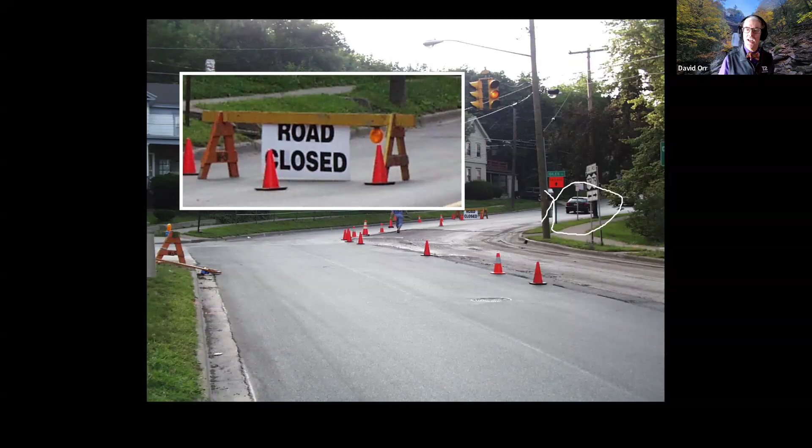Okay, so some of you are turning left, some of you are going up where the car is. Okay, and it's a little confusing, especially if you look carefully at the sign that's up there in the middle of the screen and it says road closed. What they were doing was trying to reuse the sign. I understand that, but think about what message you're giving to somebody. What you're supposed to do is come up around the corner to where this car is right here, okay? Over here on the right. And it's a little bit confusing in that respect. So again, key is communication, good, clear communication. And if you think about it, what we're trying to tell the user, the driver, is what they should do.

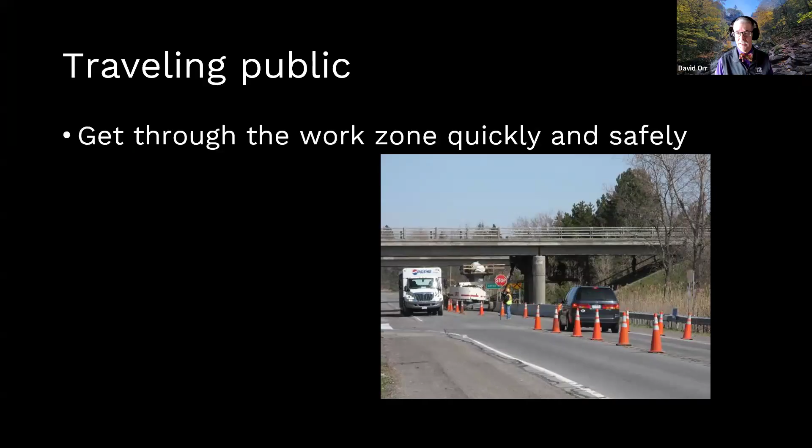The operators, on the other hand, the crews, they want to keep working without slowing down. But of course, that's not possible sometimes, and we have to keep ourselves safe. Supervisors, well, they want that job done as fast and cheaply as possible.

And then, of course, traffic control personnel. You want a smoothly operating work zone that's easy to manage, though maybe you got to work a little harder than what this gentleman is doing here.

Okay. Now, just for the sake of helping me out, I've got my participant list, and we'll lower everybody's hands. Raise your hand if you've flagged traffic, if you've been out there flagging live traffic. I just want to get a sense of that. That helps me. Oh, quite a few of you. That's good. If you didn't raise your hand, but you're involved with designing or setting up work zones, it's not a bad idea to find a way to do that, get yourself some training, and see how it is.

Flagging tends to be one of two things. It either tends to be boring, where's all the traffic, like you see in the picture, or it's just insane. And how do you even deal with it? But don't start on a big project. Start on a small one. But again, do it right. It's pretty important. The goal of this is we have to do work in the roadway.

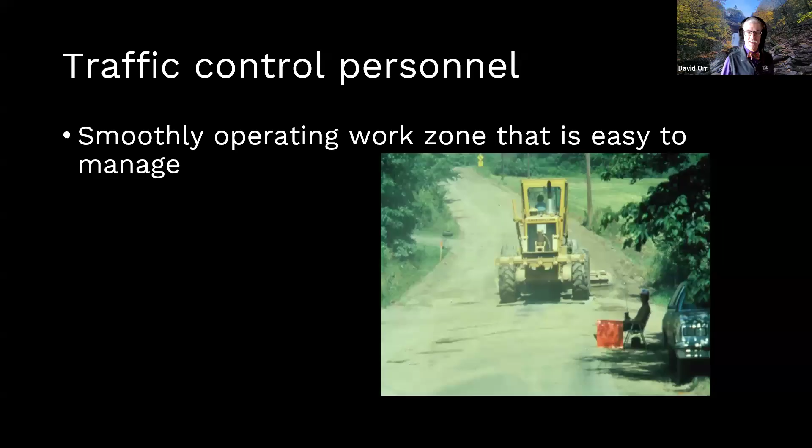We're going to create change. People don't like change, and no one wants to be inconvenienced. Okay. But you also don't want to put people in harm's way. That's pretty important. Now, I'm at home one night, and all of a sudden there's cars coming through my neighborhood. I'm like, what is going on?

Now, I did say I wanted to come back and talk a little bit about the traveling public. That includes the cars, of course. It includes buses, trucks, bicycles, pedestrians, and people who are disabled in one form or another. Okay? So let's talk about each of those just a little bit. Most of the time we think about cars. You can do simple messages maybe for cars. They're smaller, they can get around, but again, we need to communicate clearly.

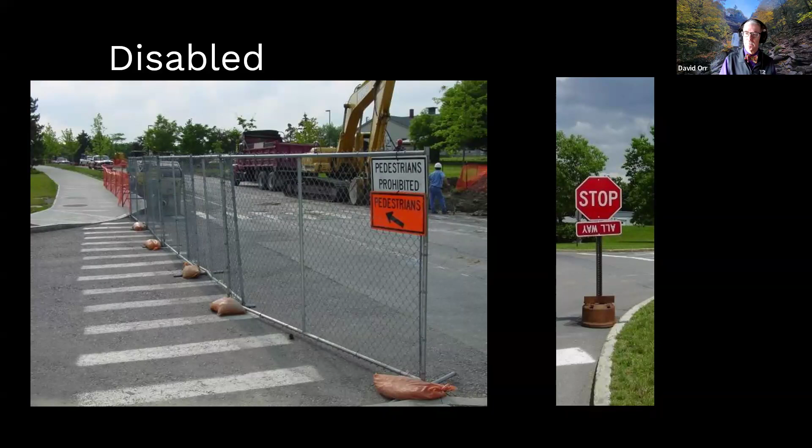So now let's start thinking about setting up a work zone. Now, what are the regulations for setting up a work zone? Well, there are 4 things I'm going to point out to you. The first one is the MUTCD. Now, the MUTCD here in New York State right now consists of the national MUTCD from December of 2023, really promulgated in January of 2024, and the New York State supplement, which actually goes back to the old national MUTCD, and New York State is working on their updated supplement. Okay, so that's the rules currently for the MUTCD.

And remember, the MUTCD applies to all roads open to public travel, which may include a privately maintained roadway. Like most of the roads here at Cornell are technically an open to public travel roadway. Okay. Now here in New York State, we also do have the New York State Work Zone Traffic Control Manual, and in the handout, which is in the chat pod, if you haven't opened that chat pod up, go ahead and open it. We'll relink that handout for you. There's a link to the New York State DOT Work Zone Traffic Control Manual, which might be a useful document for you to look at.

It's got some special details, and especially if you're doing a detailed work zone that's on a multi-lane roadway or an interstate, probably a pretty good thing to look at. And it's got standard sheets, the actual manual itself. I'll click on that. You can see all kinds of sections on road type, advanced signs, a lot more detail than we can cover in a 1-hour webinar. So if you're doing anything really complicated, that's something I would have you look at.

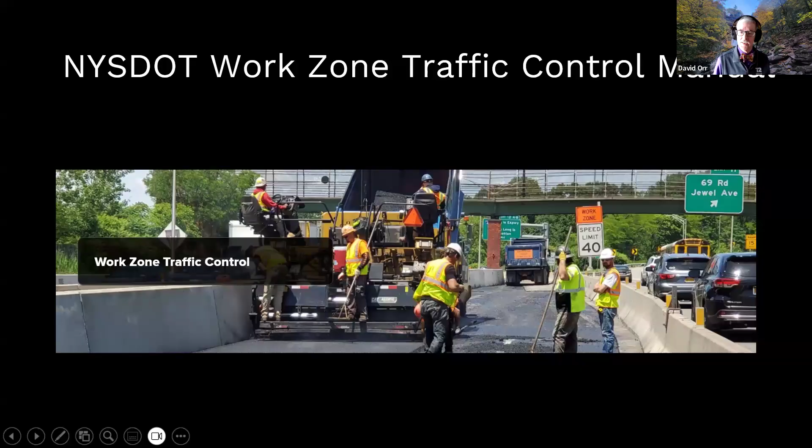Now, we do put out a work zone safety and a flagger pocket guide. These meet those standards with the caveat that they're not designed for freeways, they're not designed for really, really large roadways or high volume. They're designed for the low volume 2-lane roads that most of us deal with, a few thousand vehicles per day. And they're great starting points. But if you've got any specific details, you need to go to the MUTCD. And we'll come back to these little handouts here in a little bit. And if you need them, let us know, we can get you copies.

You'd put a left arrow. Drift. I like that one. If you had the right car, you could drift around the corner. Should follow the MUTCD standards, have some arrows. Okay, a turn arrow. Yeah.

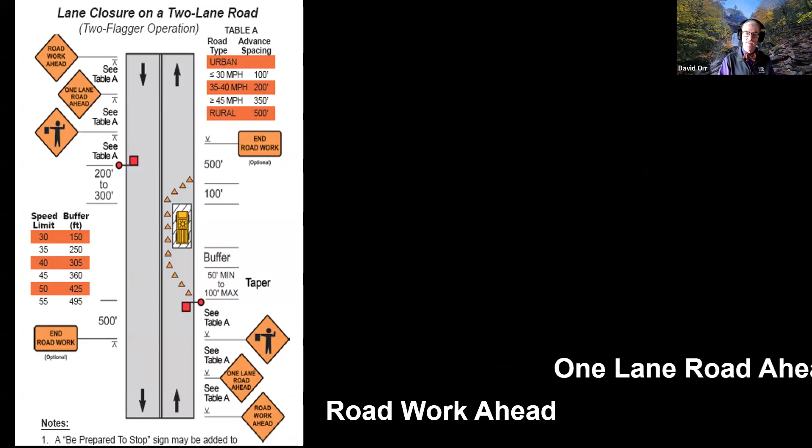So in our case of the 2 flagger operation, which is by far the most common, we would have the road work ahead, we'd have the 1 lane road, and then we'd have the flagger symbol. And we space those signs out, ranging from 100 to 500 feet, depending on the speed that people are traveling, whether it's urban or rural. And I'll come back to those numbers in just a little bit.

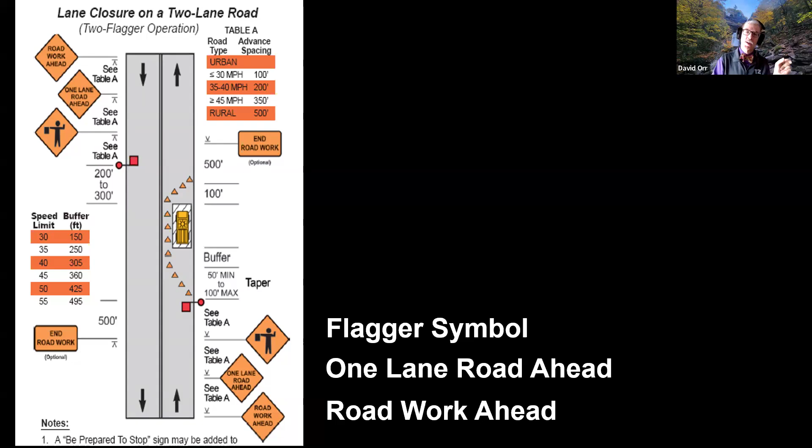There needs to be a space between where the flagger and the transition zone is and the actual work. So that if somebody does go through the cones, goes past the flagger, then you've got time for the vehicle to stop. So the question is, what is the buffer length at, well, we'll say 55 miles an hour. Well, it turns out the buffer lengths are driven by the stopping sight distance. But you don't have to memorize these things. They're in all of the standards.

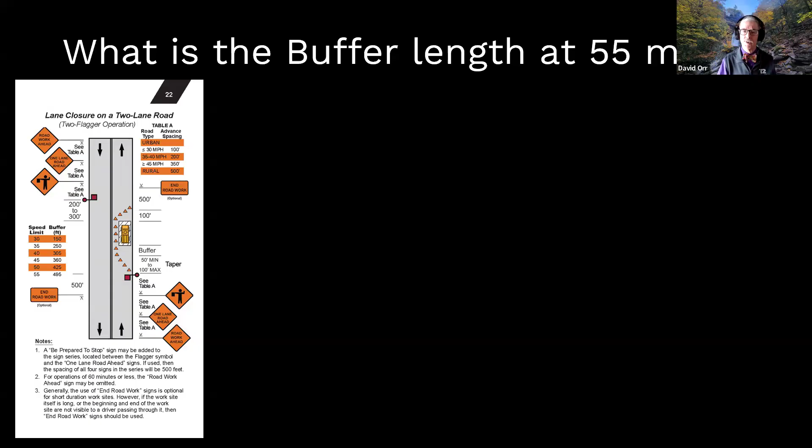So as an example, let's look at the lane closure on a two-lane road, and I'll blow it up so you can actually see it. Don't expect you to read it. It's way too small. But let's blow up the part that tells you for the speed limit what the buffer length is. Okay? So in this particular case, 55 miles an hour, you can see what the buffer length is. It's essentially just under 500 feet.

Now, somebody asked, where is the crash truck? The New York State Department of Transportation is using attenuator vehicles in their work zones. In fact, there's a note in our work zone pocket guide that specifically mentions that. You'll notice the drawings in the work zone pocket guide do not specifically call out the crash attenuator vehicle. That's not because we don't like crash attenuator vehicles, but we know in a real world situation that may not always be possible. So if you've got high speed, if you've got high volume, we recommend you look at using a crash attenuator vehicle. And again, the state DOT is going to use them on all of their work zones.

But what we're also trying to be is realistic. I will tell you right now, absolutely, you got to have a buffer space. If you're not going to have a crash attenuator vehicle, that buffer space becomes even more important. And the other thing with crash attenuator vehicles, just want to point out, putting the crash attenuator vehicle at the wrong location can actually cause an issue. It needs to be at the beginning of the buffer, not at the end. And I've seen several that were placed in the buffer zone at the wrong end.

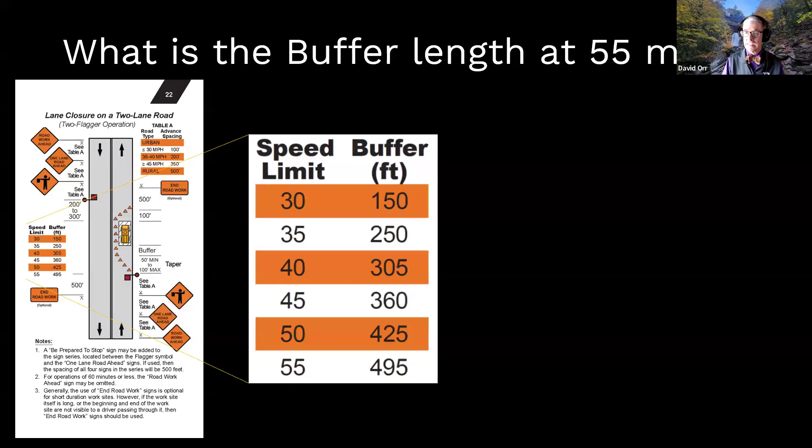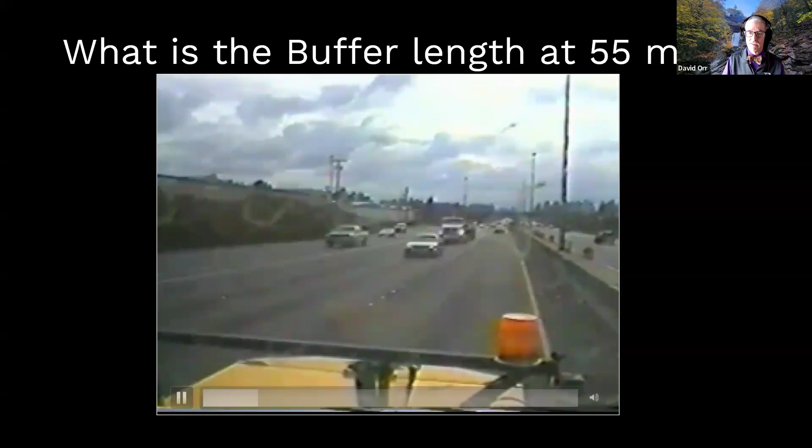And why is that important? Well, what's the buffer length at 55 miles an hour? Well, it's 500 feet. And the reason is you need the distance for the crash attenuator vehicle to move or for the person to stop if they go through the cones. In this case, you absolutely want one on an interstate system. Watch carefully. Now, the vehicle doesn't have its brakes on to start. That's how this works. Then they apply the brakes after the crash attenuator gets hit. And you can see they still went a couple of hundred feet. So it's pretty important to have a good buffer space.

And if you're wondering, the buffer space is not optional. That's not an optional space. The only optional is the last one, which we'll get to in just a minute. So you really want that space. And by the way, the buffer is not a parking space for supervisors. That is an empty area to allow either a crash attenuator if you've got them, or at least for a vehicle to stop before it enters the work zone area.

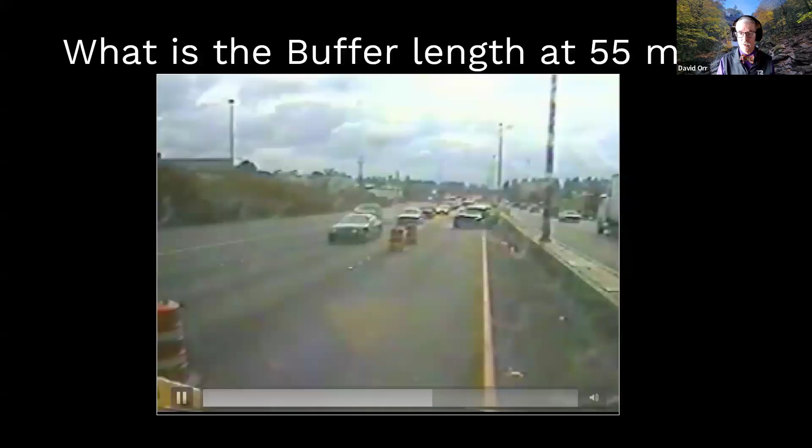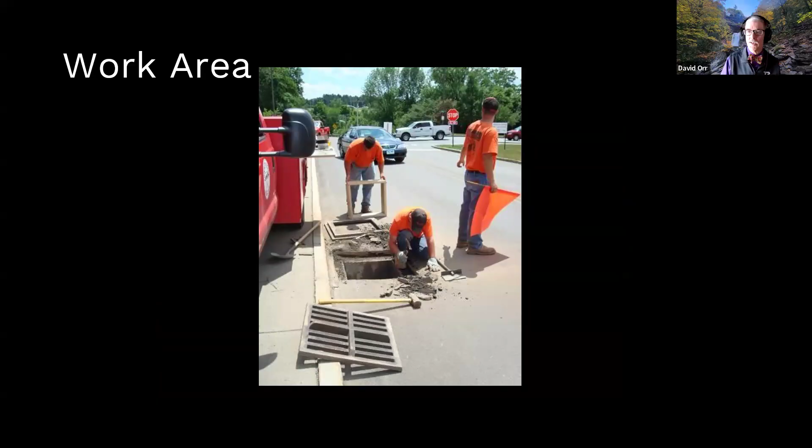Now, what are the spacing of the advance signs? Let's go back and look at that. In an urban area, it's about 100 to 350 feet, depending on the speeds, and 500 feet in a rural area. If you are from outside of New York State, the distances may be different. New York State has its own distances. I actually like the fact New York State has some slightly smaller distances for low speed, 30-mile or less roadways. But keep that in mind. You need to check your own state's regulations if you're working outside of New York State, but it depends on the speed. And again, technically, whether it's urban or rural, the key is to give people time to react.

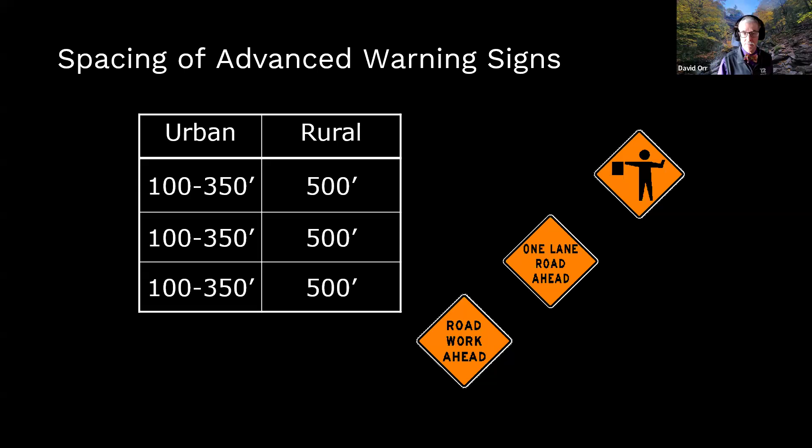Now, we need to make sure that everything's set up. The most dangerous time for putting in a work zone is when you're setting it up. Okay? So let's talk a little bit about placement and removal. Okay? Don't mislead the public.

So the first thing you're going to put up are your advanced signs. So you're going to put up a road work ahead sign. You're then going to put up your one lane road ahead sign and then your flagger symbol sign. You're going to put those signs up and you can put a fourth sign if you want to. Okay? Now, what goes next? What goes next?

Now, I've got a note in here in the Q&A while I'm listening. I want to have you guys throw the answer in the Q&A on what goes next after the flagger symbol sign. Our old friend Al Bachner, who's one of our circuit riders, does point out the fact that you do need a buffer space in front of a crash attenuator vehicle if you're using them. So your buffer space gets even longer. But that means you have to have the space for the crash attenuator vehicle to move forward, as well as the buffer space for the work.

So again, if you're using them, there are standards. That's why I wanted you to go to the New York State DOT work zone guide, because it talks about those spacings and all that. And do you have that spacing?

Okay, so let's see what we've got listed here in our what goes next. I've got cones. I've got the sign for the end. I've got a flag tree. I've got a taper. I've got the distance to the work zone, cones and barrels. Ah, there it is. There's the one I'm looking for. The next person, or next item that goes in, is the flagger themselves.

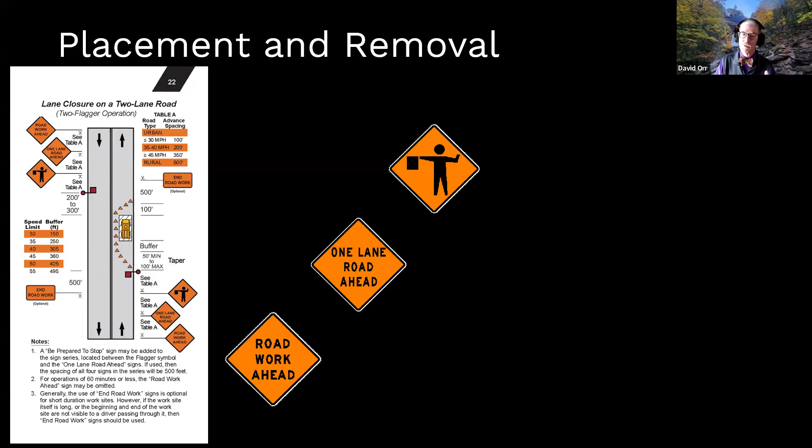And to take things down, don't take that flagger out and still have the cones up, because what do people need to do? So remember that. The order should actually be the cones come next, not the flagger. Okay? So the cones would come down, the flagger would actually be the next to last person, and then you remove your signs in the exact opposite order you put them up. Because it's the single most dangerous time.

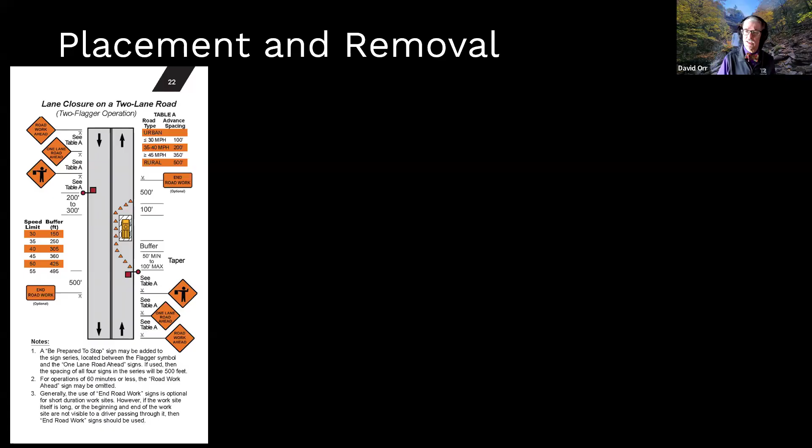Now his helmet came off, but he picked it right back up. He picked his hard hat up. And that's why, by the way, in some work zones, they're actually putting helmets with the straps to keep them on. But luckily, no serious injuries here. Again, putting up a work zone is one of the most dangerous times. So keep that in mind as you're moving forward. Okay?

Now, again, I'm going to say this again because it drives me nuts. Hide, cover, or turn away your work zone signs when they are not needed. Okay? Hide them. Don't show them. It drives me nuts when I see them up in the middle of the night.

And if you're working around a corner, all the same signs come into play. But again, think about sight distance. Think about where you're going to put the flagger. You know, if you just use the standard distances, but you put the flagger on the wrong side of the corner, can they be seen? You know, all of our pocket guides and our work zone drawings all show nice, perfectly straight roads, but they're not. So think about hills and curves and stuff like that. Okay? And in an hour, we just can't go through a lot of details.

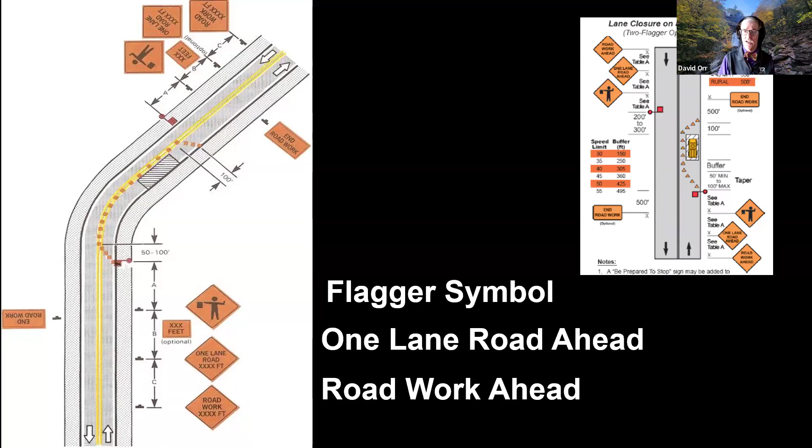Now, let's talk a little bit about flaggers. We don't have a lot of time to talk about flaggers, but they are one of the most important parts of a good work zone. They should not be the person who's the last person on the job and never does things quite right. No, you actually want your best people being flaggers. They're protecting you. So what are the qualifications for a good flagger? If you could throw into the poll, what do you think are qualifications for a good flagger?

Attentive, alert, sober. They have some endurance. Yeah. They pay attention. Yep. They should be trained. Not on the phone. Yeah. They like the idea. Somebody put in a note about putting a couple of cones next to the flagger station to highlight where they're standing. I always like that idea to move the cones around with you. Yep. So all kinds of things.

We know what good flaggers should do, but a lot of times we don't necessarily practice what we think about. To me, a good flagger must be alert, watching traffic. It's like security people at a sporting event who have to watch the crowd and not watch the event. Flaggers need to be watching the traffic. They need to be in a place where they can be seen. They need to be visible. Okay? They really should be the people who have a little bit of motivation, that really want to do the job to some extent. Okay? You need to make sure they're trained to do the job.

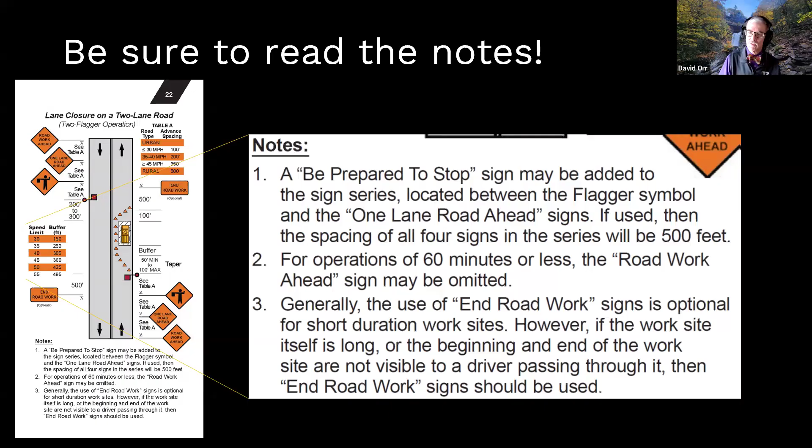So let's just look at the 1 and 2-flagger operations and the notes in the 1-flagger operation. And I'm going to put this one on and read it to you just because it's pretty important. A single flagger may be adequate for low volume situations with short work zones on straight roadways. Where 1 flagger is used, the flagger must be positioned to be visible to approaching traffic from both directions. Okay?

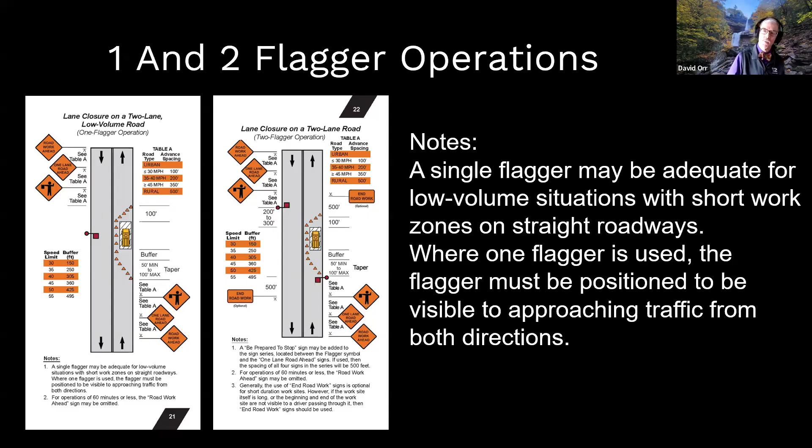I'll come back to that idea in just a second, but I just want you to tell me when you read that, you say low volume, put in here, what do you think is low volume? The answers aren't going to show up. I want you to type them in and I'll show the answers. I'm going to read the one question in the Q&A while you're putting your answers in.

And somebody is noting the fact that they want to know if there's ever been an issue with a flag shown in the sign and the person down the road is holding a paddle sign instead of a flag. That was the one with the flagger in the roadway. They had a paddle at the other end and a flagger. The liability of that is just off the charts. You really want to have everybody coordinating with each other.

Okay? So we've got people putting in the Q&A, and let me go see what you guys did for responses. And the responses are less than 400, I've got 1,000, I've got 500, I've got 50, I've got side roads. Over in the Q&A, I've got one car every few minutes, less than 200 vehicles. It's not super well defined, okay? Now, the AASHTO low volume book talks about 2,000 vehicles a day, and they define very low volume as 400 vehicles a day, which is about one vehicle a minute when people are going to work.

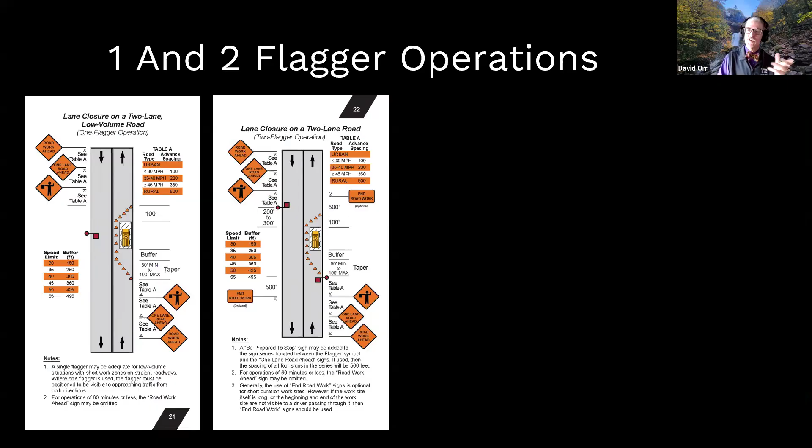But here's another way to think about this. Okay? Now, it's a little riskier on high speed roadways too. So I get a little nervous even on a 55-mile-an-hour roadway. I like low speed as well. Okay? Even though it says 2-lane low volume. Think about this. Ask yourself this question, trying to decide between these two. Can the flagger walk between the work and buffer areas between vehicles approaching the site?

Okay? Because in the case of a single flagger, they shouldn't be just standing in one spot the whole time across from the work. They actually should walk to one end or the other to help move the traffic. So if they need to walk from one end of the work zone back down, they have to go past the whole buffer to get to where the taper is. Walk back and forth. So they're really walking.

And again, my pen has decided today of all days to give up the ghost. Yep, it's still not working. So we're going to do this the old-fashioned way. And I got to pick a color other than white because you're not going to see white. I can tell you that.

Let's do purple. They need to be able to walk from this end as a minimum to this end, including the buffer. Maybe even a little further past the transition would be even better. But as a minimum, they got to walk that. If they can't do that between vehicles showing up, you've got too much traffic.

So you've got a really long work zone, you need 2 flaggers. If you've got a lot of volume of traffic, you need 2 flaggers. If it's high speed and not a lot of time to be able to see in both directions, you need 2 flaggers. So answer yourself that question, and it might be able to help figure that out.

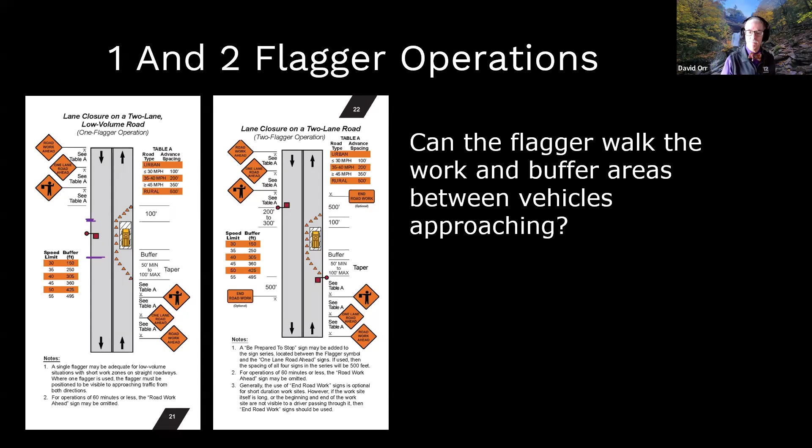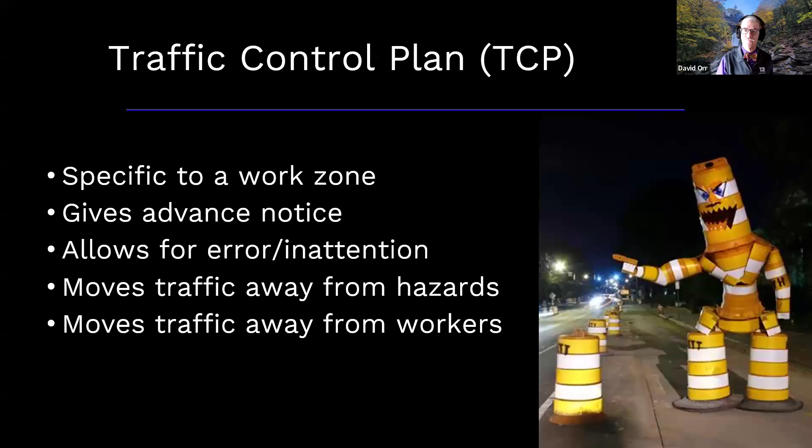So in terms of doing a traffic control plan, it's specific to your work zone. It gives advance notice, allows for errors and inattention, and moves traffic away from the hazards. And more importantly, it moves traffic away from the workers. So what do I need to have in my traffic control plan? Put in here, what's the minimum? And I'll show you my list. We'll give you about 20, 30 seconds.

Yeah, it's what signs you're going to use, the personnel, the date, the time. I'm looking for 2 things, which I hope to see here, and then we'll move on. All kinds of answers. Signs, flaggers, cones. There it is, the weather. The weather is actually one of those things we don't always think about, but it's absolutely critical. So you want the starting and ending time, location, any devices, personnel equipment. If you change a regulatory device, you want to include that as well. And then again, you absolutely want the weather, okay?

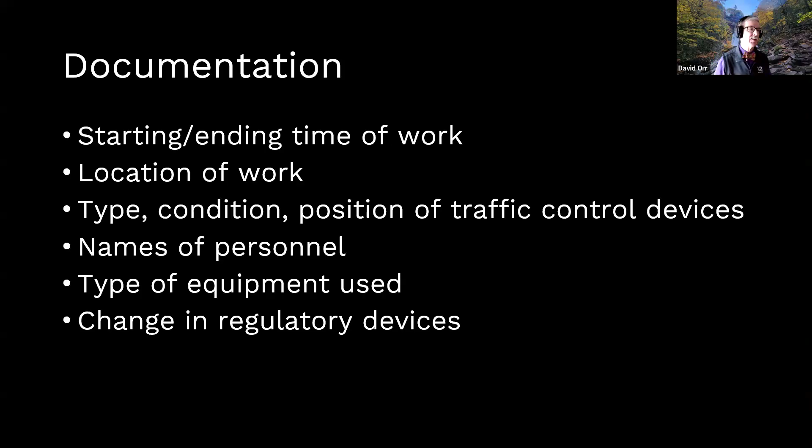I actually like to make traffic control plans by taking that work zone pocket guide, go down to a copier, find the one sheet I want to use, put it on the copier, hit copy. I've now got my work zone traffic control plan 3/4 of the way done, and then I just draw on it the additional stuff. The date. I haven't added the weather yet because I'm doing this in the office. When I get out there, I'm going to finish writing it up including the weather information, what time we actually started and ended, and that becomes a perfectly fine record.

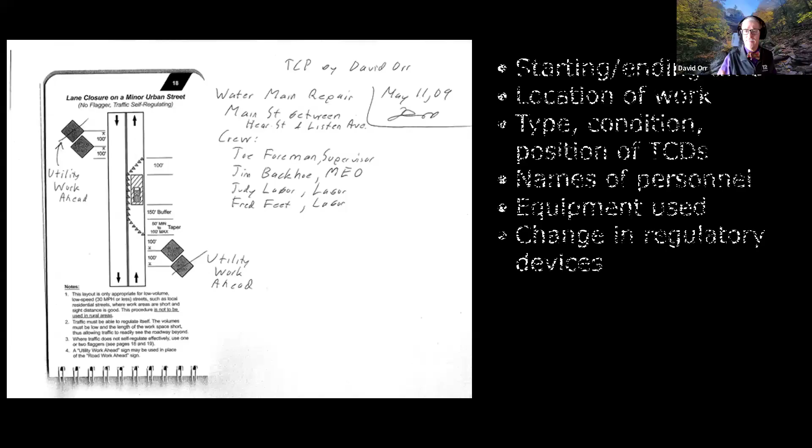And someone asks, do we recommend radios? Well, I'd love to see radios, but I know there's an economics involved. So again, always do what you can with what you've got, where you are. Think about the public.

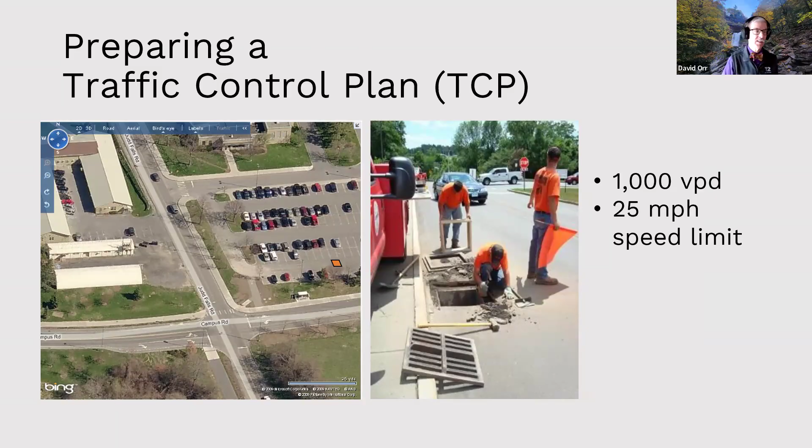So again, something to think about. And of course, there may be times when you do something else. Heck, you may even just close the roadway off and do a detour around, depending on the work, if you can do a reasonable detour.

Should work zone signs be retroreflective? In this case, we won't even do the Q&A. You can put it in there. You can raise your hand. I don't care which way you want to do it. Is that a yes? Yeah, raise your hand. Say yes, either one. Yeah, absolutely, they should be retroreflective. We think, I'm not working at night, but here in New York State, it can get dark at 4:30 with a cloudy day. You really want that retroreflective, and truth be told, you need it even during the day. It can help. Okay, so yes, absolutely, we want work zone signs to be retroreflective.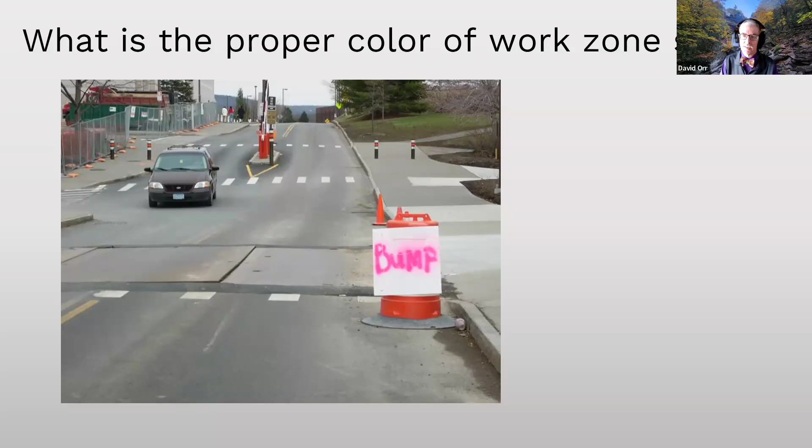The idea is if you're flagging traffic or you have people flagging traffic, you want them to be standing where they're safe. What's the proper color for work zone signs? It's a shall, but I do know that a lot of people, yeah, it should be orange with black lettering. There are a couple of exceptions. The regulatory signs are still going to stay there black and white. The railroad crossing symbol sign is always yellow and black. Do what you can with what you've got. You know, if you've got yellow and black and that's all you've got, I'd rather you do that than this. This is just not good. But most important thing of all, document what you do and why you do it. Because if you don't document it, somebody else might.

Who should be wearing high-vis clothing in a work zone? Yeah, everybody. Okay, if you're not engaged in actual police activities, maybe the police won't need it while they're doing police activities or the fire people. You certainly don't want that. But everybody should be wearing high visibility. It actually gives you respect. It gives you rapport, and people go, "Oh, okay." They pay attention.

7 feet, 1 foot. Permanent signage would be 7 feet in an urban area, 5 feet in a rural area. If you're doing a long-term work zone with permanent signage, yeah, you'd want the higher 7 feet in every case. Okay. Again, not only respect, but if there was snow, if the grass grew up, you want some height. You want to be able to see the signs. Put the signs where they can be seen. Okay? That's the most important thing.

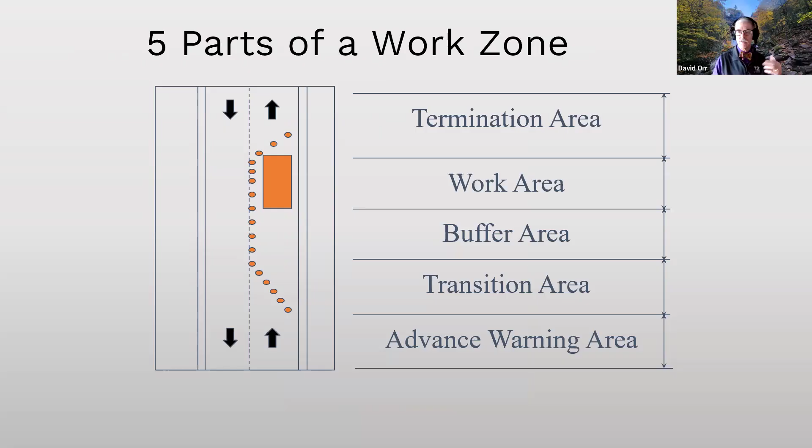And the single most important part, in my mind, if I had to pick one that I don't see enough, is the buffer. The termination is the one optional. Okay. You want a good work zone. But also think about the places that aren't these 5 areas. The other lane. Think about how vehicles are going to interact with that. And then why are work zones important? Why are work zones important?

Put in there, why do you think? Safety. Yeah. Safety, protect lives. And to get work done. We do want to get work done. I mean, a good work zone actually makes you more productive. We've done some research on major roads. And I can tell you right now, if I've got a good work zone crew, I can get the job done faster, more efficiently, and I actually get better quality. But yeah, the number one item you're putting there is safety.